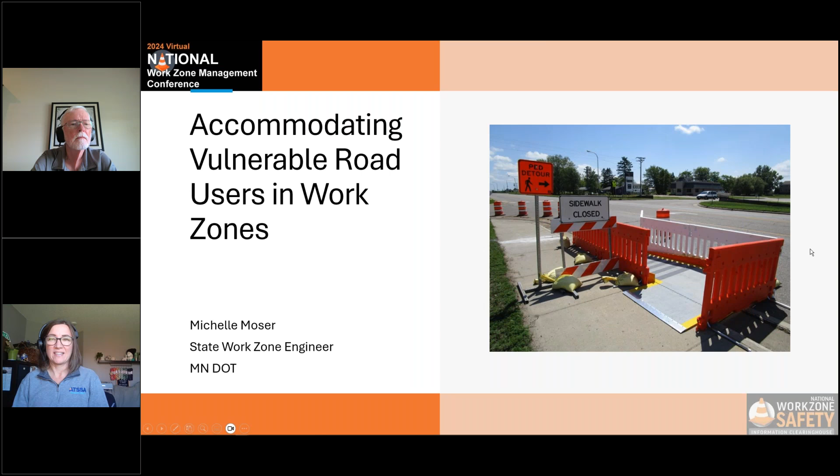All right, so I will talk a little bit about the requirements and some design considerations for accommodating vulnerable road users, peds, bikes, people with disabilities, and then I think Tim is going to cover some devices. So in the MUTCD, which is really our overarching standard for all types of traffic control, including temporary traffic control, Chapter 6 covers temporary traffic control.

And the first standard in that chapter is 6A01, a general standard. Needs and control of all road users, motorists, bicyclists, and pedestrians, including people with disabilities, through a TTC zone shall be an essential part of our work. So right up front, first standard, we are told that we need to accommodate everybody.

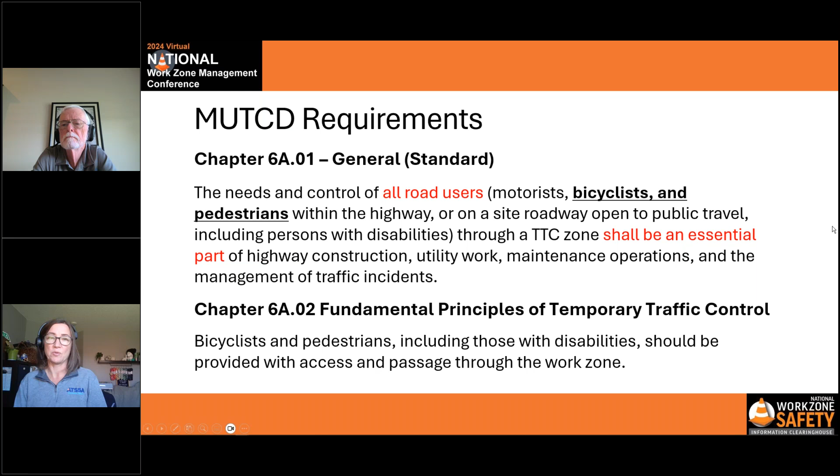In 6A02, fundamental principles of temporary traffic control, it talks a little bit about bicyclists and pedestrians, and those, including those with disabilities, should be provided with access and passage through the work zone. 6C of the new MUTCD talks a lot about pedestrians and workers. So these are just a few snippets.

So pedestrian considerations prior to closing any sidewalk or pedestrian facility. Of course, the maintaining agency should advise people of the future closure. And if the temporary traffic control zone affects the movements of pedestrians, adequate pedestrian access and walkways shall be provided. So again, really solidifying that we shall be providing accommodations for pedestrians.

6C03 talks about accessibility. When existing pedestrian facilities are disrupted, closed, or relocated, those temporary facilities shall be detectable and shall include accessibility features consistent with the features present in the existing pedestrian facility. We'll talk a little bit more about that as we talk about design considerations later. And then a barrier that's detectable by a person with a vision disability shall be used in that closure to make sure that we do not have people wandering into our closures where it's unsafe for them.

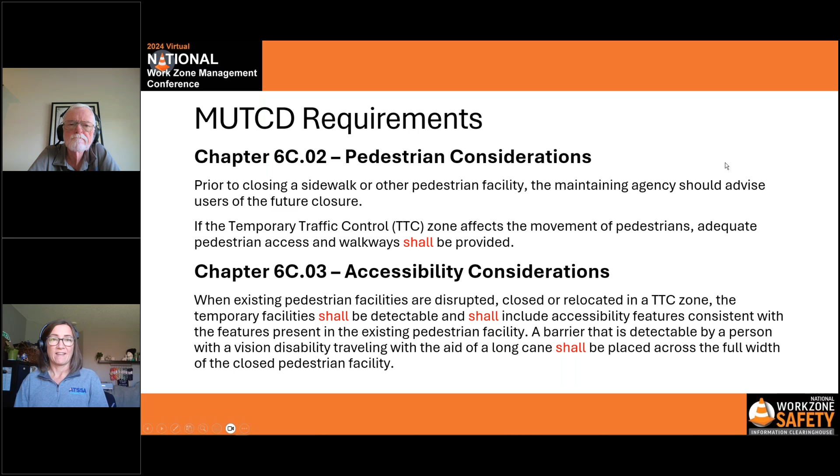There we go. In 6N, further on in the chapter where we start to really talk about the nitty-gritty work affecting pedestrians and bicycle facilities: where pedestrian routes are closed, alternate pedestrian routes shall be provided. So again, really solidifying the fact that we do need to provide an alternate route. When existing pedestrian facilities are disrupted, closed, or relocated, those facilities shall be detectable and include accessibility features.

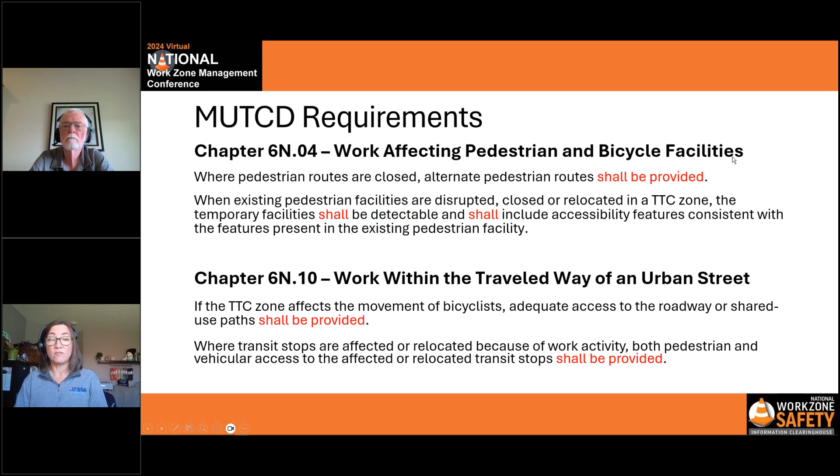So again, solidifying that. And then in 6N10, work within the traveled way of an urban street, talks a little bit more about the movement of bicyclists. Adequate access to the roadway or shared use paths shall be provided for them. And then also transit stops. So it's very important to provide access for both pedestrians and vehicles to get to those transit stops.

So aside from those snippets from the MUTCD, and of course there's much, much more in Chapter 6, PROWAG, the Public Rights of Way Accessibility Guidance, which is part of the Americans with Disabilities Act, also talks about accessibility. This contains guidance on both temporary and permanent facilities, so it does address work zones in that temporary capacity. And it does say when a pedestrian circulation path is temporarily not accessible due to construction or maintenance, etc., an alternate pedestrian access route must be provided and comply with some further criteria in that document.

It does give an exception if it's infeasible to establish or maintain an alternate pedestrian route, you can determine alternate means. A lot of times that might mean having an escort or a shuttle to get people around your work zone. At MnDOT, we have adopted PROWAG even prior to it potentially soon being adopted by the US DOT.

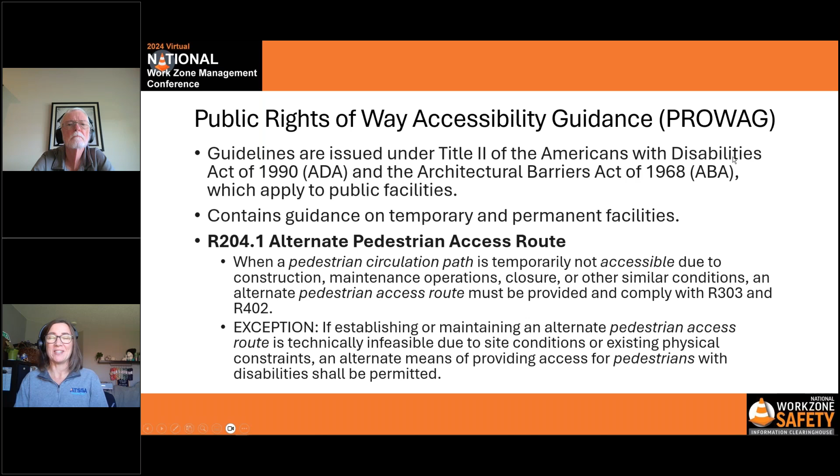And aside from these standards and laws, it's just the right thing to do, right? Pedestrians and bicyclists are users of the transportation system. Walking, rolling, riding are all valid ways to get to your destination. So we really need to be cognizant of that and accommodate all of our transportation system users.

So really quickly, a few design considerations. When you're planning for accommodations, you want to make sure that you evaluate pedestrian and bicycle routes and needs early in the stages of your project development. So in scoping and pre-design, make sure you're documenting things in your transportation management plan. So at a minimum, if you're impacting peds, as we're told in the MUTCD, we need to provide alternate pedestrian routes. We need to determine the level of accessibility needed.

So we really need to go out, take a look at what's happening in that area where we're going to have our work zone and determine those needs and document them. Also document conditions that don't meet recommended standards. So of course, this is not an easy thing to do, and we can't always meet everything. We can't be perfect in everything we do, but we don't want perfection to get in the way of progress. So doing our best to accommodate and then documenting the places where we don't is valid engineering judgment, right?

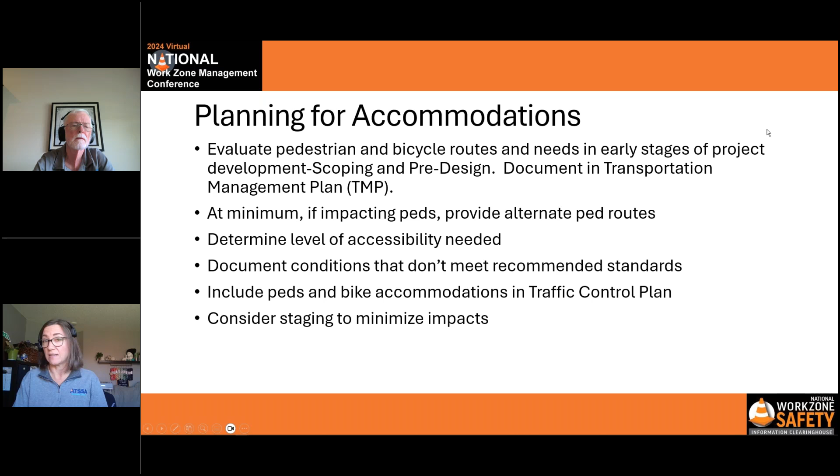Include pedestrian and bike accommodations in the traffic control plan. Again, this is not something that's super easy to do, and it does take pre-planning. So we shouldn't really expect contractors to be able to bid correctly or construct this temporary traffic control zone if we're not letting them know what they need to do. And then consider staging to minimize impact. So if it's proving hard to accommodate pedestrians, maybe looking at staging or timing your work differently to minimize impacts or keep accesses open to important facilities.

Quickly, so where do we put pedestrians? Along the same route is always best. We're creatures of habit. We like to go the same way to our destination. If that's not feasible, sidewalk bypasses keep people at least in that same general area. And then detours are last and least preferred.

There is a statement in the MUTCD that said pedestrian detours should be avoided since pedestrians rarely observe them. Of course, people will get through our work zone if they can. And those longer detours are difficult for elderly people or those with health conditions or disabilities to traverse a longer distance. MUTCD typical applications 28 and 29 give you some recommendations to assist in your plans.

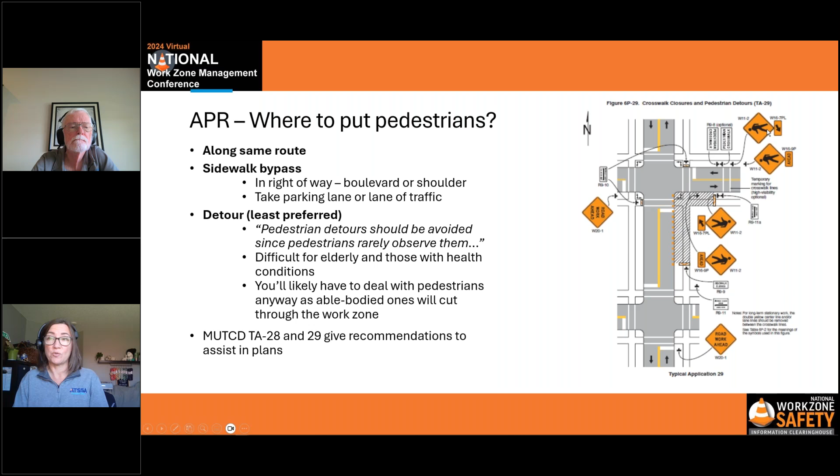Quickly, bikeway continuity may be a little bit different there. When you're on a bike, you can traverse a longer distance. If we have signed bike routes, we want to try to maintain continuity. You can potentially accommodate closures or temporary closures with flagging operations, or a detour in which you would need some advanced notification, signing, and other coordination, because usually these bike routes are shown on bike maps, etc.

And then if you just have known bike use, again, including that in your traffic control plan, accommodating them, giving them a place that they can get through the work zone, or giving them a detour. And if you need to fully close a bike lane or bike path, of course, closing that with signing.

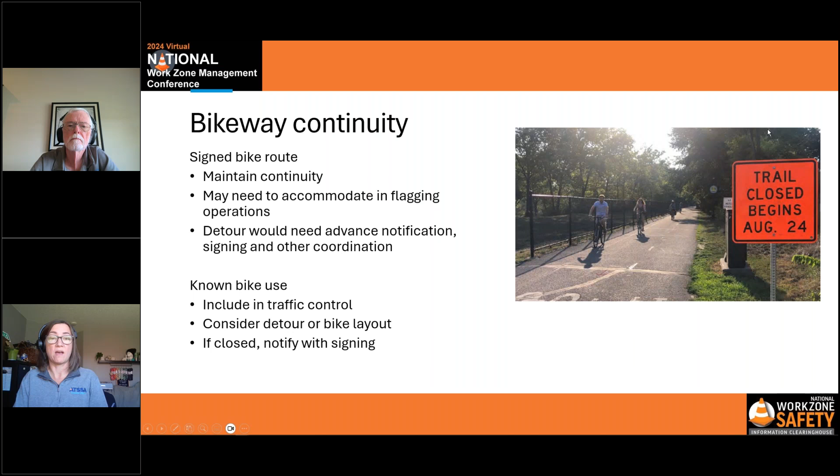A few routing considerations. Of course, we want to maintain access to existing destinations and facilities. Very important, as we're told in the MUTCD, for transit. Parking, so we want to relocate any disabled parking, making sure that people can get to building and business entrances and schools. And then minimizing traffic and work area hazards, so shielding, protecting, and/or advising peds and bikes when that alternate route might increase exposure to hazards.

Considering traffic speeds and volumes, that will impact the devices that you use. Looking for those direct conflicts with traffic and potentially using pedestrian signals, temporary crosswalks, and looking at that work vehicle access to make sure that pedestrians are not in conflict with those work vehicles. And then work area separation and debris, dust, and noise protection. Of course, if the workers need PPE to be protected from this stuff, we want to make sure that we take pedestrians away from that because they will not likely have that PPE.

And then lastly, communication is really key here. So using informational signing, placing that signing as far in advance in both time and space as possible. Utilizing audible information devices. So there is some information about that in Chapter 6C03, talking about how pedestrians with visual disabilities, etc., are not able to see printed signs or other indications that we're giving them.

And then using tactile devices. So making sure that we aren't using tape, rope, plastic chain strung between devices, snow fence, that kind of thing, because that is not accessible for those with disabilities. So that was a quick rundown of your standards, etc., and I'll hand it over to Tim to talk about some of the devices.

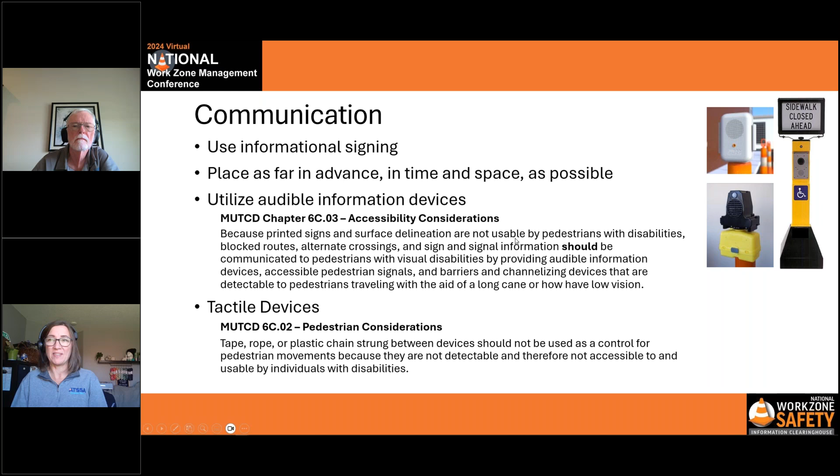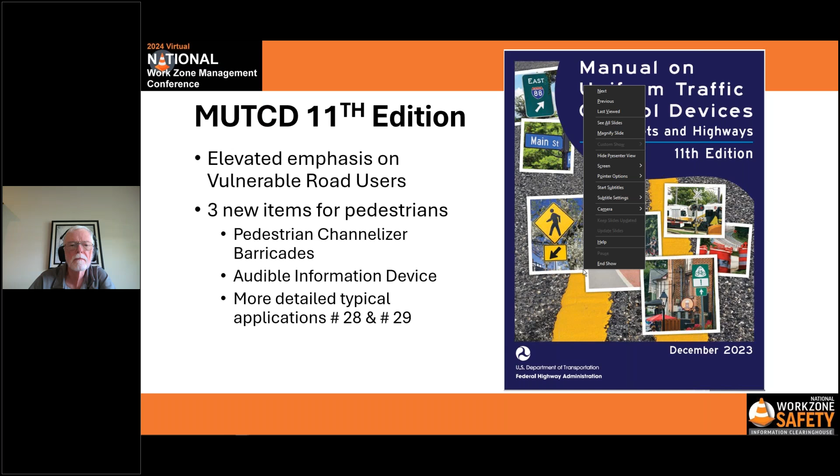Good afternoon. I need to have a little bit more patience with the system.

So Michelle gave us a good background on what's the requirement, in particular how PROWAG fits into this, and as PROWAG becomes subject to rulemaking by DOJ and DOT, then we need to kind of step back and see how those things fit together with what the MUTCD has. Luckily, as the MUTCD 11th edition was put together, the anticipation of PROWAG means that many of the things that are going to be in the PROWAG rulemaking will already be covered, although we'll have to do some adjustments, I'm sure.

But I'd like to focus on the things that are different in the 11th edition for practitioners who are setting up a work zone. What are the things that they need to be conscious of and aware of? With the new emphasis on vulnerable road users, there's 3 items that I think practitioners should be conscious of: the pedestrian channelizer barricade, audible information device, and then the new expanded details in typical applications 28 and 29.

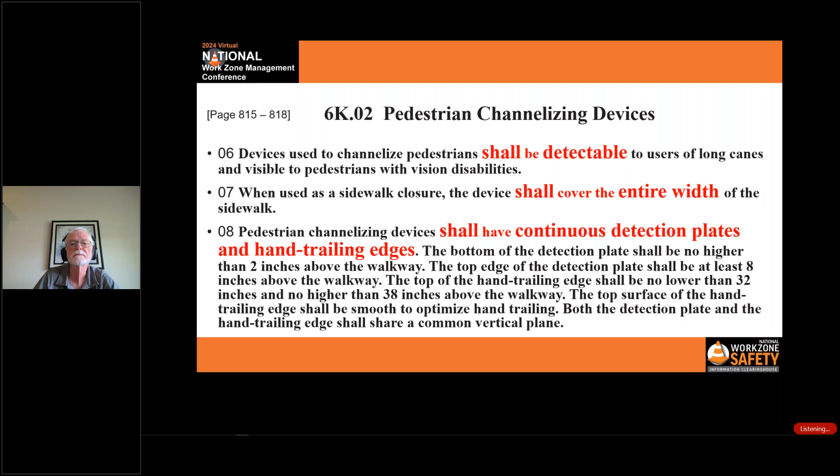So when you look in the manual, figure 6K2 describes the pedestrian channelizing device. And as one of the people that helped put this drawing together, I'm chagrined to note that it's more confusing than it is helpful. What we were trying to do when we put this together is to accommodate all the different methods that pedestrian channelizing barricades may be installed, and how their support device may fit.

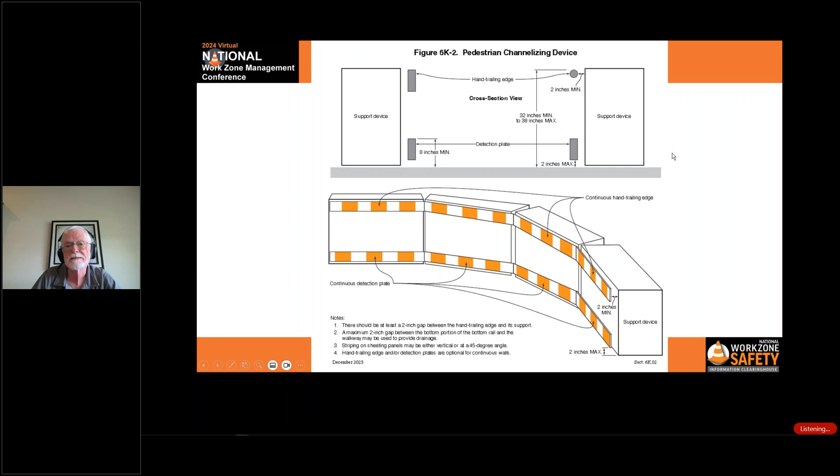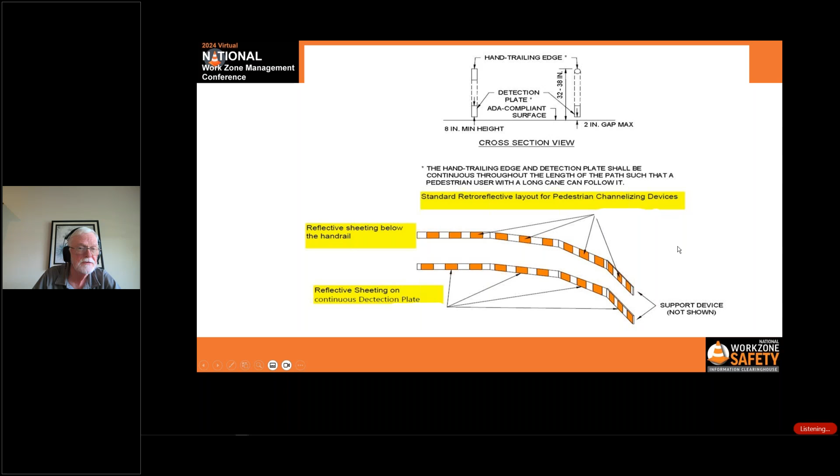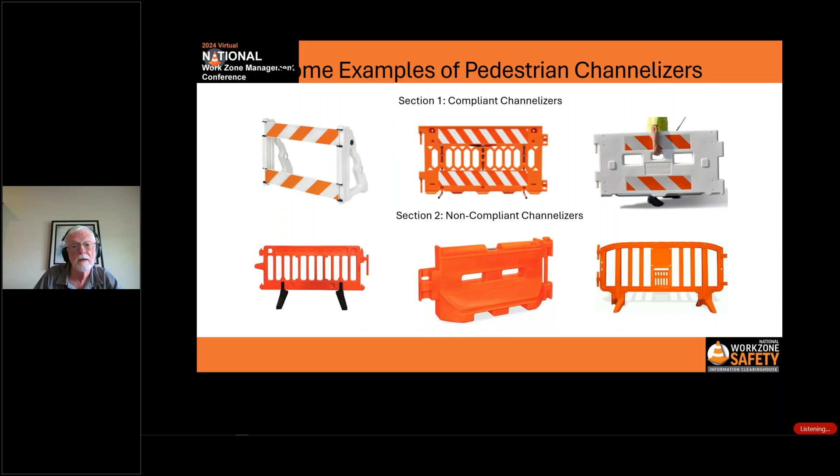So the audible information device is again a new item in the 11th edition. In the prior edition, it said it's a good practice to provide information by audible devices, but in the 11th edition, it says in the text, should be communicated with audible information devices, and the background for that is printed signs are really helpful for those of us with normal vision, but if you're low or no vision, you can't receive the message on how to proceed.

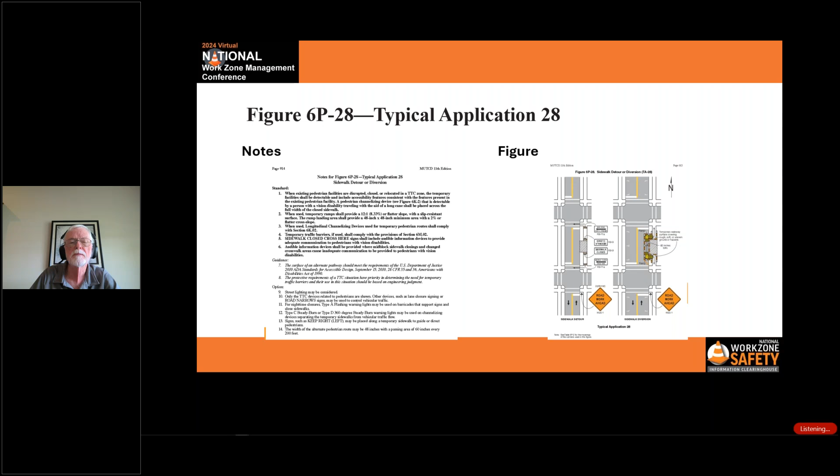This is typical application 28. I'm going to talk about both the text and the figure. The text this time treats the audible information device a little differently. Well, first of all, it repeats once again the sidewalk closure barricade needs to cover the full width of the sidewalk. It gives information about what is required should a ramp be needed, what level of service the ramp needs to give in terms of slope and width, etc.

And then it addresses the audible information devices, and this time it uses shall rather than should. Sidewalk closure signs shall include an audible information device, so as they approach that sidewalk closure, low vision pedestrians can know what their next move might be. And in mid-block sidewalk closures, the same thing.

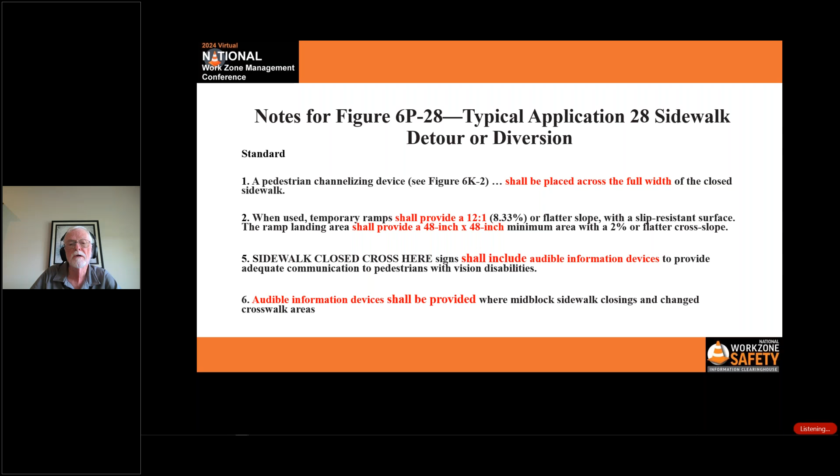So this is typical application 28. On the left hand is a detour moving them around to the alternating sidewalks as opposed to moving up to the lane closure itself. On the right hand side is a diversion, and I just made it a little bit larger on the right.

This is all very new from the prior MUTCD. It specifically calls for pedestrian channelizer barricades around the entire route, both between the pathway and the workspace and the pathway and the motoring traffic.

There are two other subsets of this that are important, and one is this crosshatching, which means that should there be a surface that is not hard surface, like grass or others, that are not compatible with mobility devices, this should meet the same requirements, firm, stable, and slip resistant, that's called for.

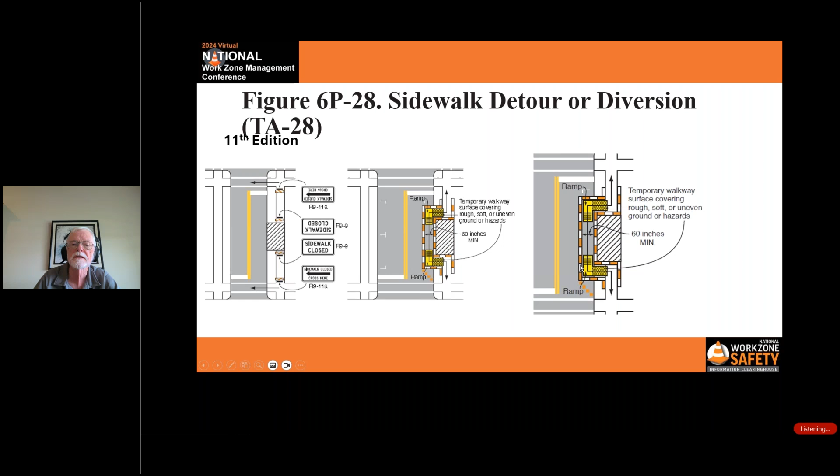The ramp has a turn. In this case, the diversion is into the parking space. So there's a platform at the top of the ramp that allows the people to redirect their wheelchair and other mobility devices, and then a ramp down to the surface, and the reverse when you get to the other end. So the idea of speaking about ramps and how they and pedestrian channelizing devices fit together is what is new in the new manual.

When you're looking at a ramp, there are several things that are really critical, and they talked a little bit in the notes about it, but the slope of the ramp has to be 8% or less. The platform has to have no more than a 2% slope, the turning space, and then the surface of the ramp itself has to meet that firm, stable, and slip resistance. And I'll show a little bit more about that in a little bit.

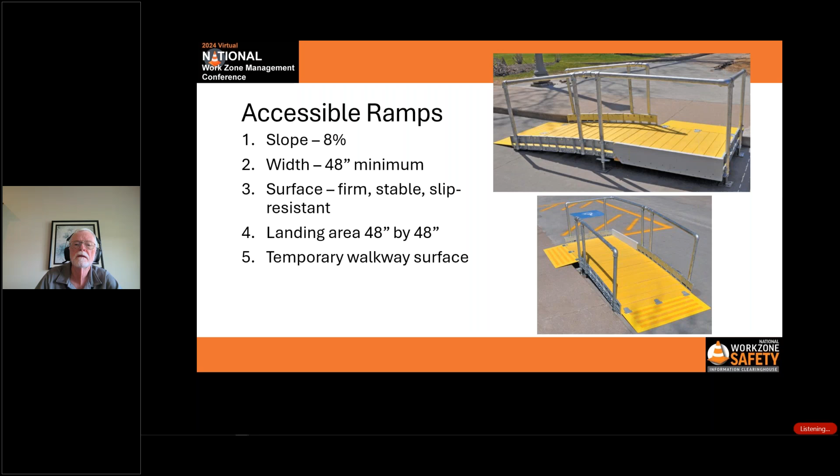So once again, I got a little too aggressive. I want to go one more.

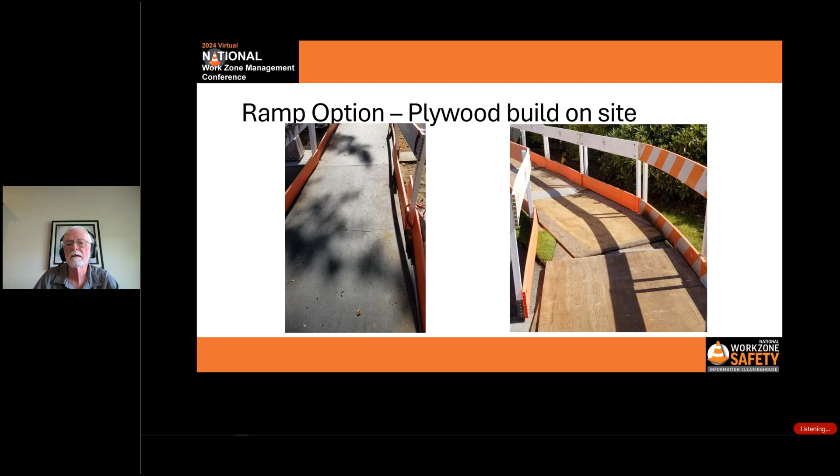The most common ramps and alternate pathways that we see right now are made of plywood and constructed on site, which is a very good option as long as the plywood is treated, because the plywood you see that's untreated becomes a slip risk when it's damp or raining. So it's really not ADA compliant.

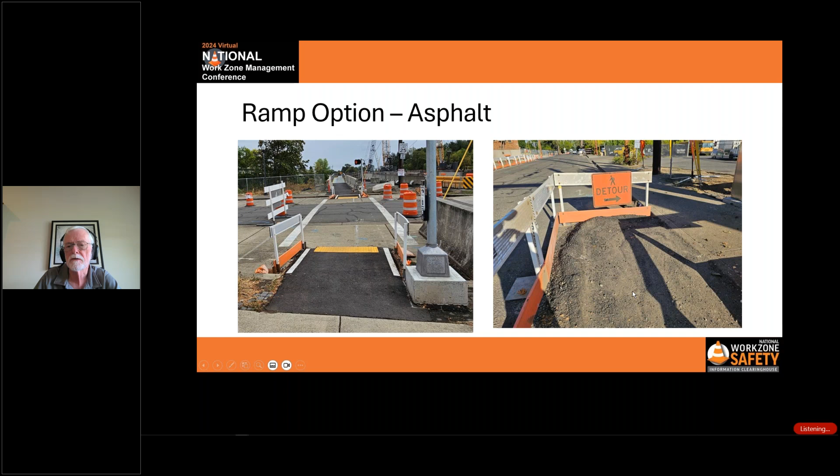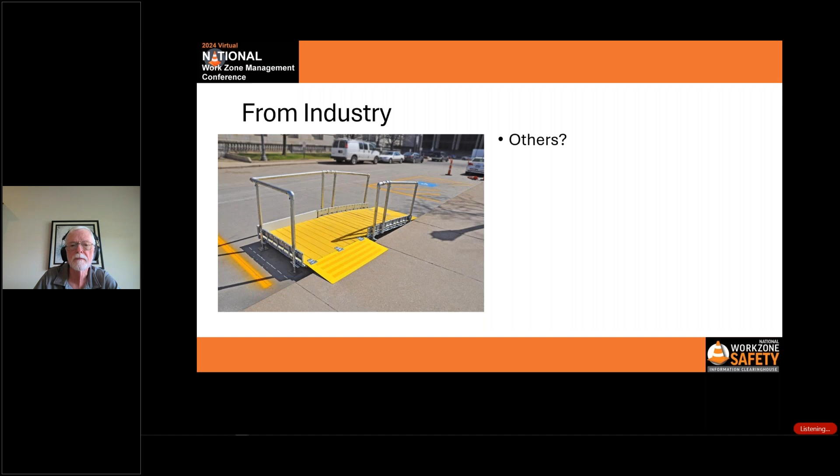Another good option is the use of asphalt. The asphalt has to make sure that it's stable, though, and that it's not going to be affected by pedestrian movements, and it must meet the slope and standard, not like you see here on the right, but rather more like on the left. So there's a couple of them that industry can now provide. Industry is a little bit in the catch-up mode on this, but there are ramp alternatives available.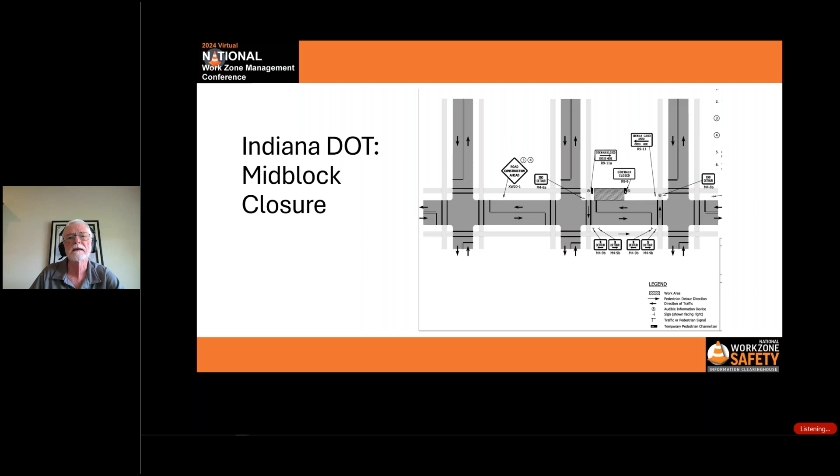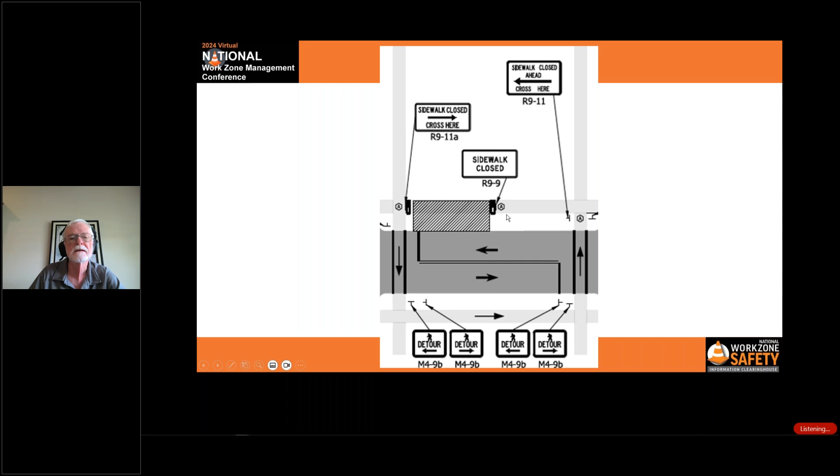And I'll go quickly through this. Indiana has done a lot of work on their typical applications for work in the state, and so here's an example of a mid-block closure. They show the placement of the audible information devices and how they're routing the pedestrian travel. This one is a mid-block temporary crossing. In addition, here they built a temporary crossing with ramps that get people from the sidewalk level down to the level of the surface.

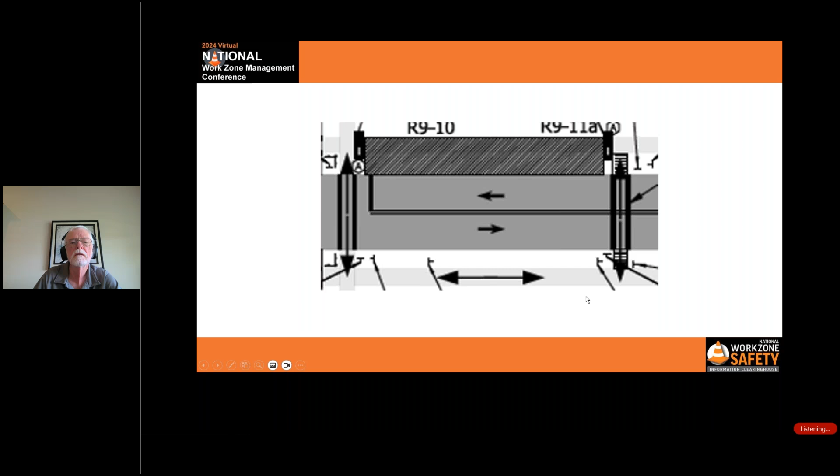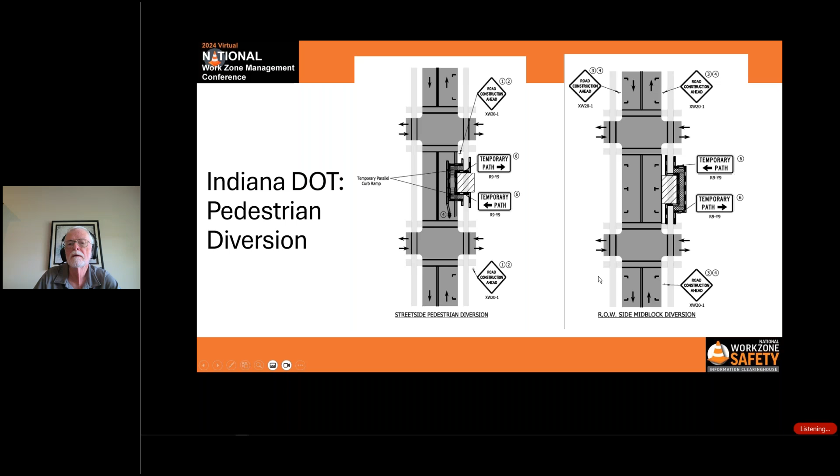Two diversions. One that we saw early in TA28, which shows the diversion in the parking lane, and the other one, space available, you run the diversion on the back side of the workspace, out of the street traffic, making it better for everyone.